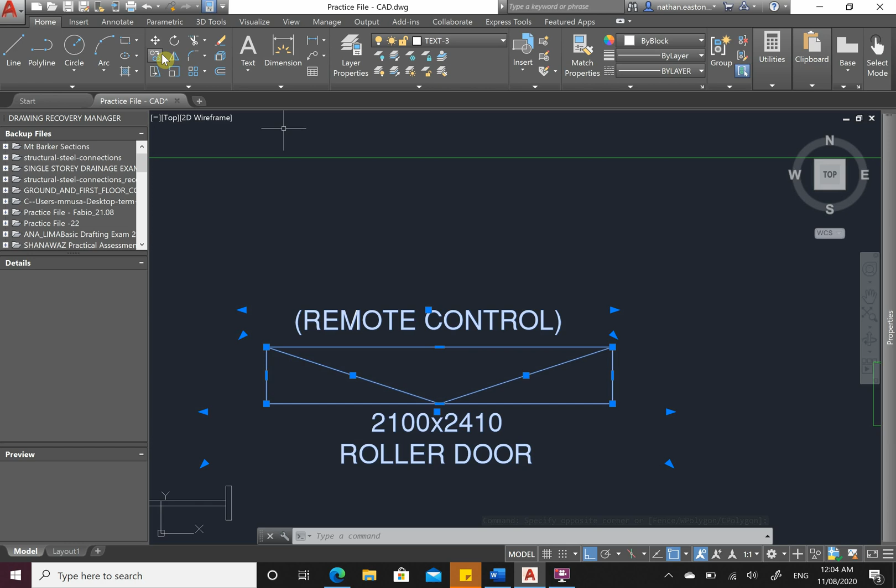So doors and windows. Now you have this here in your template. Let's start to put some in. Let's start with the garage door. So a single garage is this one here. So 2100 high, 2410 wide. Remember the stupid measurements that they decided to put for doors and windows. Copy, grabbing from the midpoint and going to put it at the midpoint here.

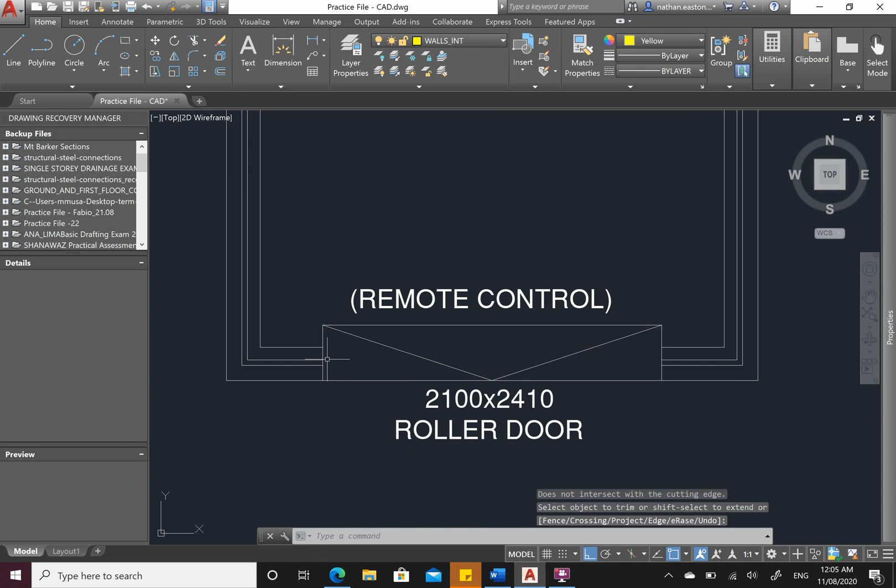In reality, our roller door doesn't sit outside of our house. The brick will sit on top of it. So let's move it from here to here. Alright, trim. Click the box I want to trim to. Enter or right click, and I'm trimming those lines. Enter. See how satisfying that is, cutting all those lines. It's very nice. Alright, next thing.

Entrance door is a 920 for our entrance door. I want it to open to the left. So this line here shows how it's going to open. So if the door is closed, it opens along that path. So it's opening to the left. Select it, copy, zoom right in, copy from the door jamb, and let's place it here. So it's going to sit on the stud. Okay, what you're going to notice is this door jamb sits nicely where the stud is.

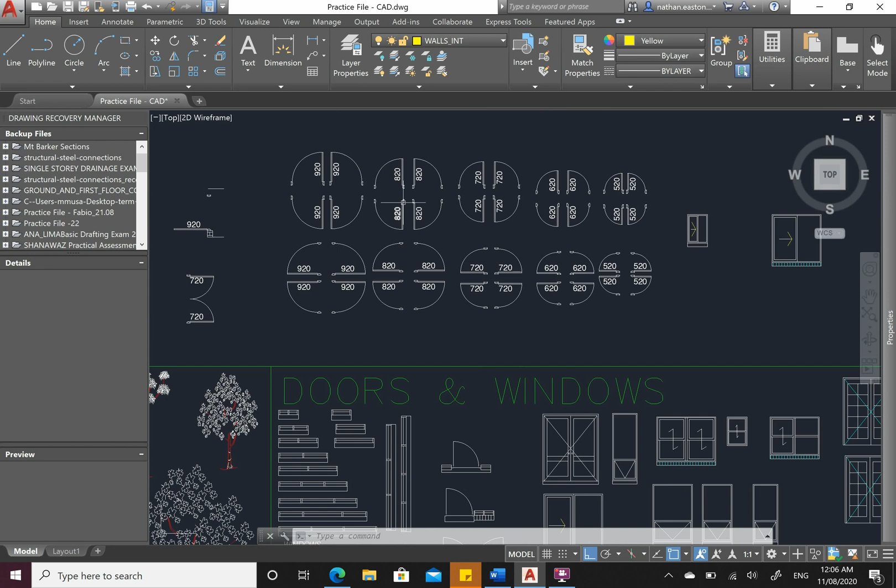So here is 920. Alright, I'm not going to trim that yet. I'm just going to leave it as it is for now, and we'll tidy it all up after. Garage door is an 820, opening this way. Copy again from internal of here. Now internal doors we don't measure, so we're just going to put them roughly there. Good rule of thumb is if you can, be 80 to 100 away. So that's 61. I might just shift it 19. Okay. So just a nice distance.

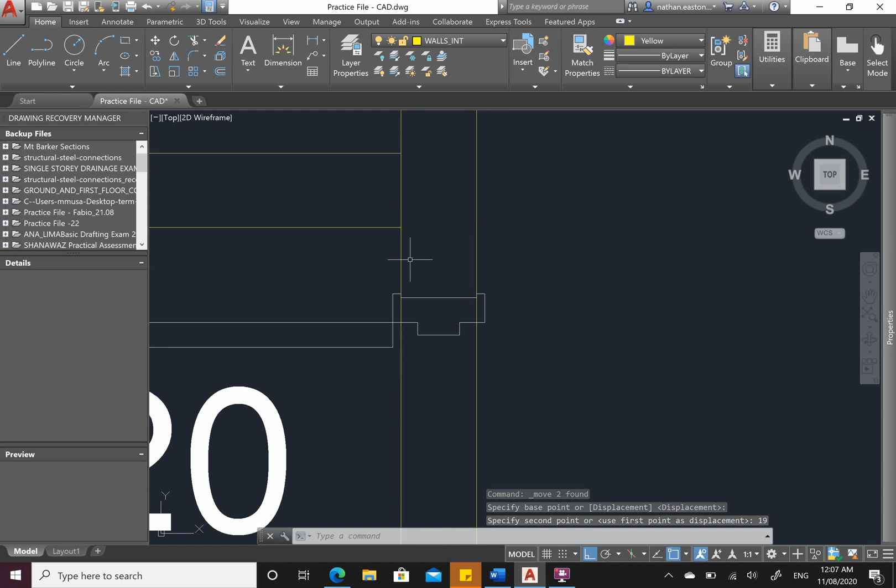You can put them hard up against it. You'll see down the track when we put on notation, we tend to shift a little bit around these here. But we'll have to put these exactly in for our external openings. But for now, maintain 80 to 100 gap away, and all should be okay.

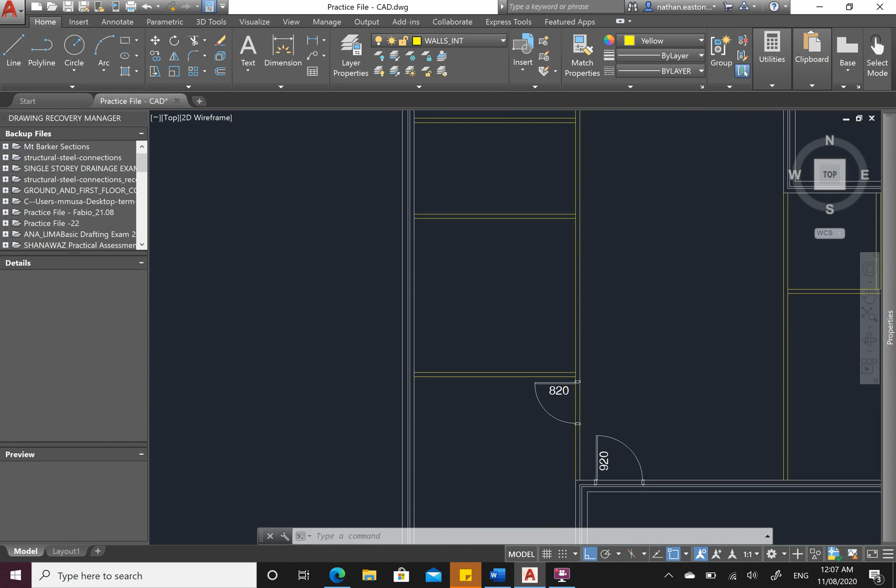The next thing I want to do is the door on the other side here. So there's two ways that I can do it. I can just mirror, or I can just grab the other door. So let's grab the other door. It's not the end of the world. Let's grab this one. Copy from here. Alright, so about there. Bathroom isn't an 820 door. Bedroom here is. So about there.

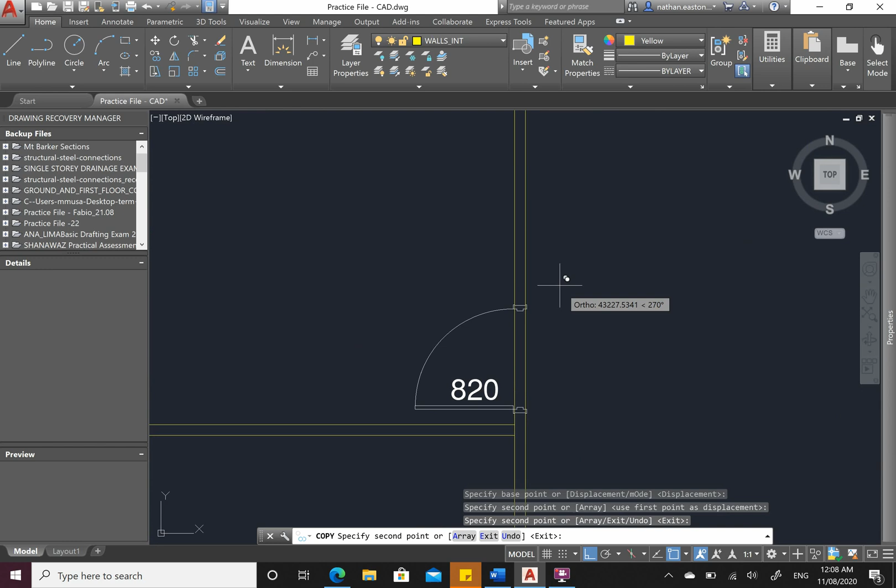Cool. I'm sorry if you can hear snoring, by the way. My dog has fallen asleep. And I don't really want to wake her up because she might bite me.

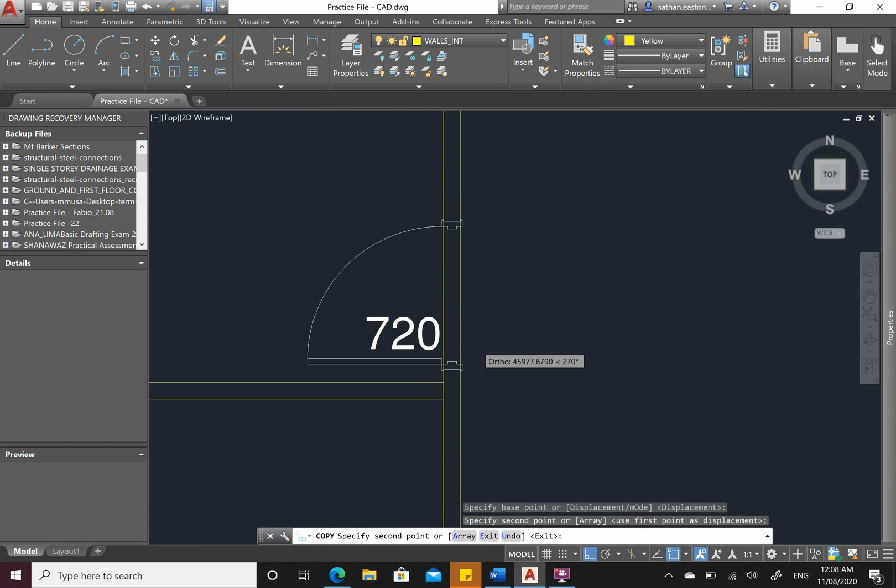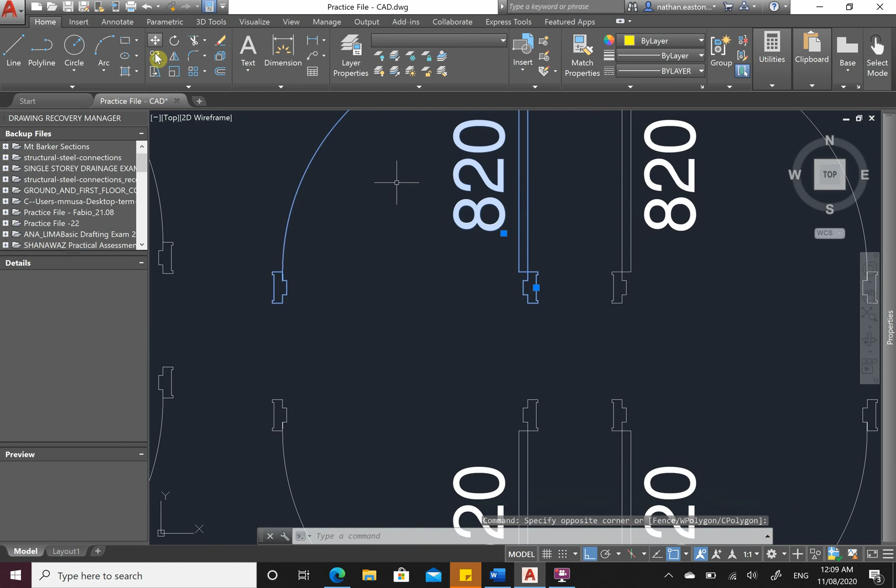Next thing is the bathroom, which is a 720 door. Copy from here. So bathroom door opening here. That's going to be an 820 door in there as well. So I can copy this one. Do in there. We're going to need a door here. Opening here. So what I'm trying to do with all my door openings is I want to open them up against a wall.

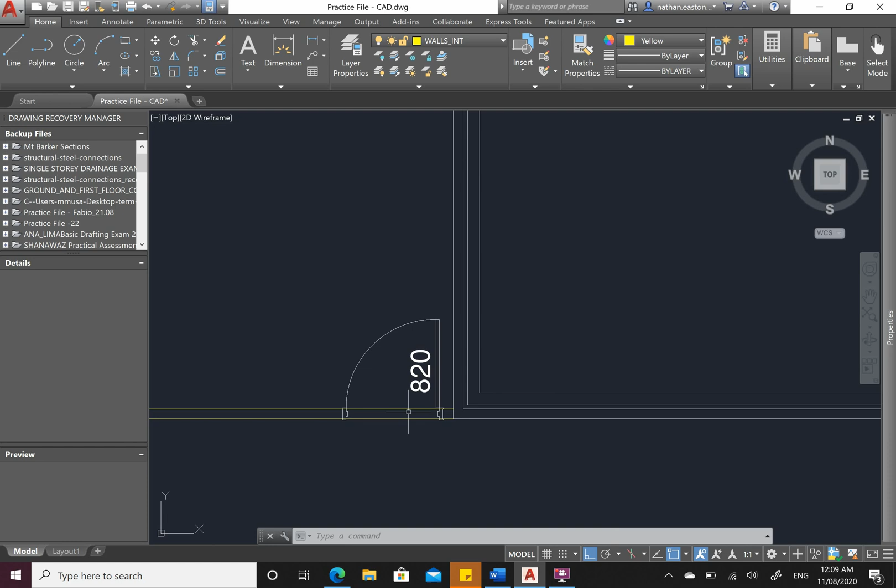So what I mean by that is you've got to try to visualize yourself walking into this house. If you're walking into this room, door is shut, so you're going to grab it probably with your right hand, you're going to push it open to the right, and then you're going to walk into open space. What you don't want is to open it from here the other way. So grab it with your left hand, push it open, and then have the door just wasting space on this side. So it's good practice to open against a wall. So if you look at all of them, they're all opening against a wall.

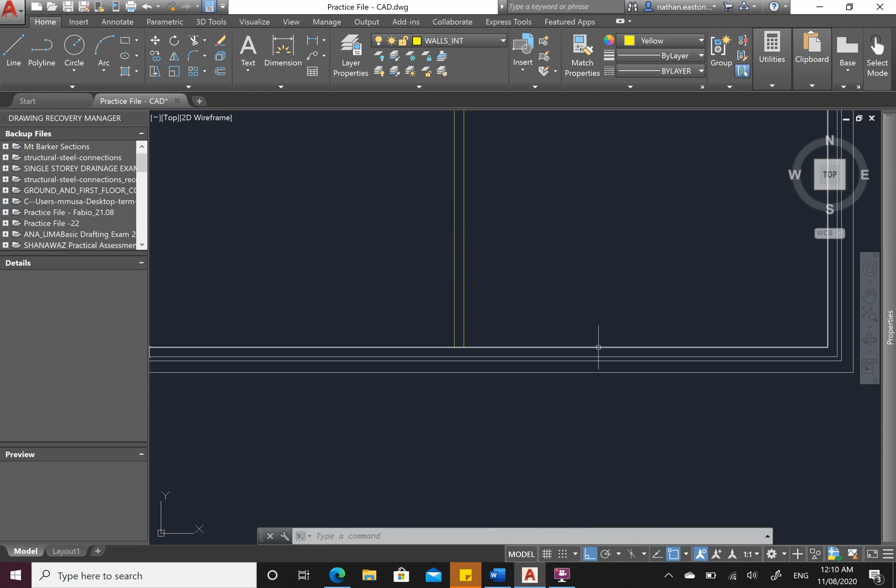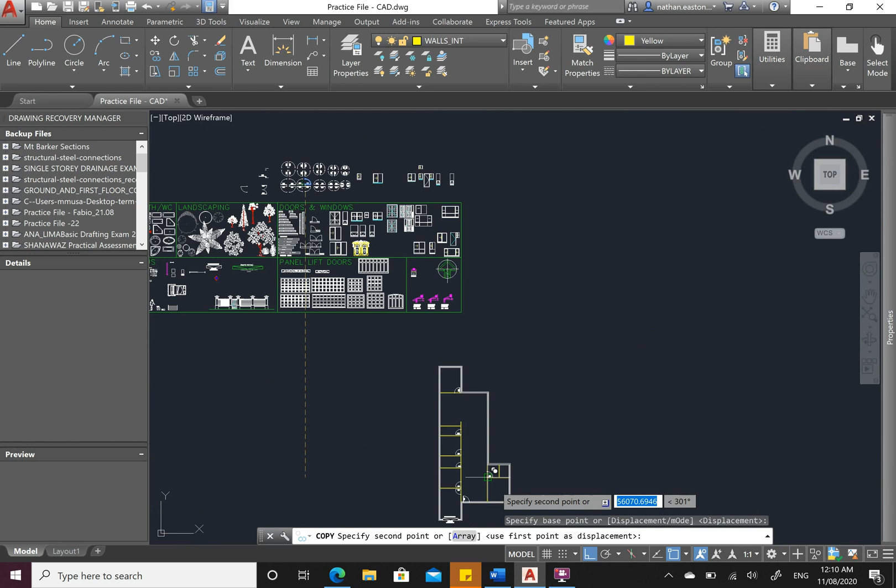Trying my best to have them open from right to left, except for the garage. At the moment, but we'll see. This one here for the master bedroom is going to be sitting here, opening against this wall, and then ensuite will open against this wall, and walk-in robe we're going to do something a bit different, a little bit fancy over there. So the main bedroom, 820 door, opening against the wall. Copy here. To there. Ensuite is a 720 door.

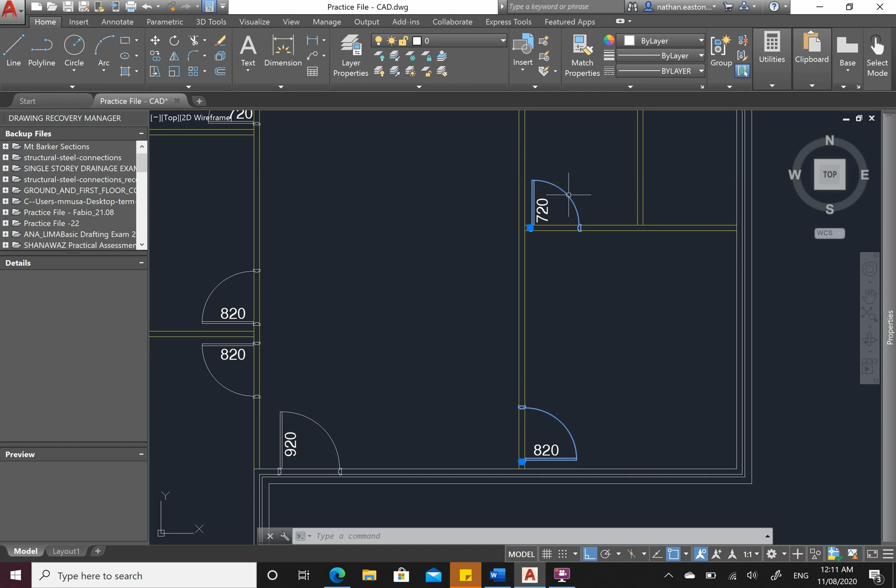Now, I know I'm going a bit quick through this. You can just pause the recording and find the doors and take your time going through it. Please don't rush this. Try to understand how things are coming together. The other thing that you'll notice is the doors are on this 0 layer, which I don't want. So let's select all the doors. The reason why I don't want this 0 layer is it doesn't print. And let's find door, awesome. So doors are here, cool. Now the 820 is text, so that's okay.

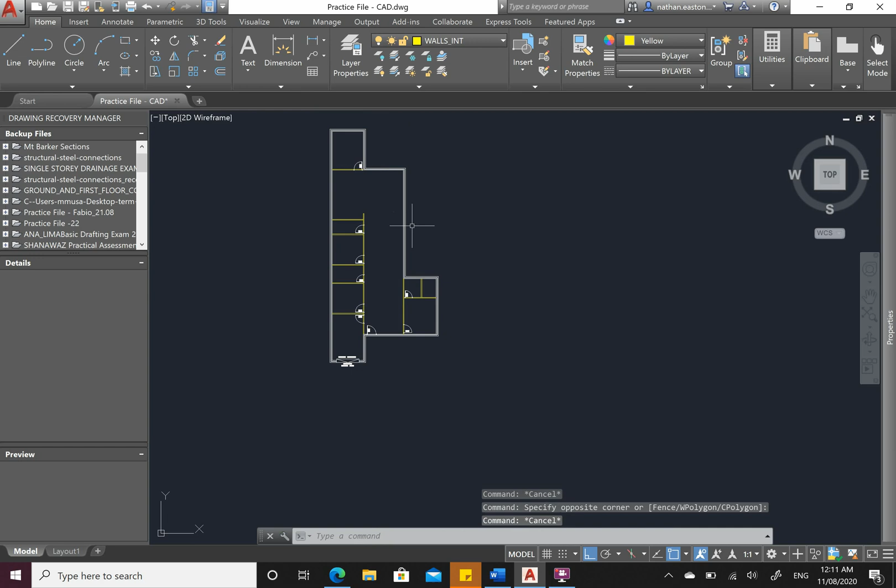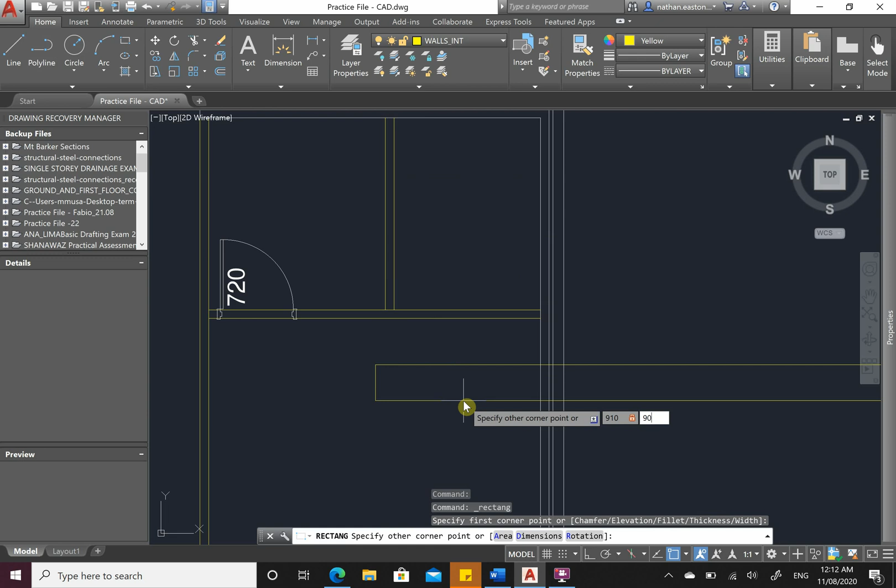Now this one here for the walk-in robe. So a walk-in robe is just a little room. You walk in, you have your clothes hanging up, like a wardrobe that's built in. Okay, but you walk in, you got your clothes there, you get changed and get ready for work and all of that. So we don't have to put a door here. What we can do is draw a rectangle. I'm going to draw one in here, which is 910 wide by 90. Just going to change this layer here to be on doors as well. So door.

What I'm going to do as well is I'll make it dashed. Let's go this one. Change properties. Change the scale. Let's try 500. See how that looks. Doesn't really look that good. 1500. Not really doing much. What about 1? Looks a bit better.

So move over here. Now this one here we can try to center the best we can. So it's 320. That's 270. So there's 50 millimeters between them. So move 25 to the left. So just putting it center. Trim. Select what I'm trimming to, which is this rectangle. Enter. And what I want to do is cut these other lines.

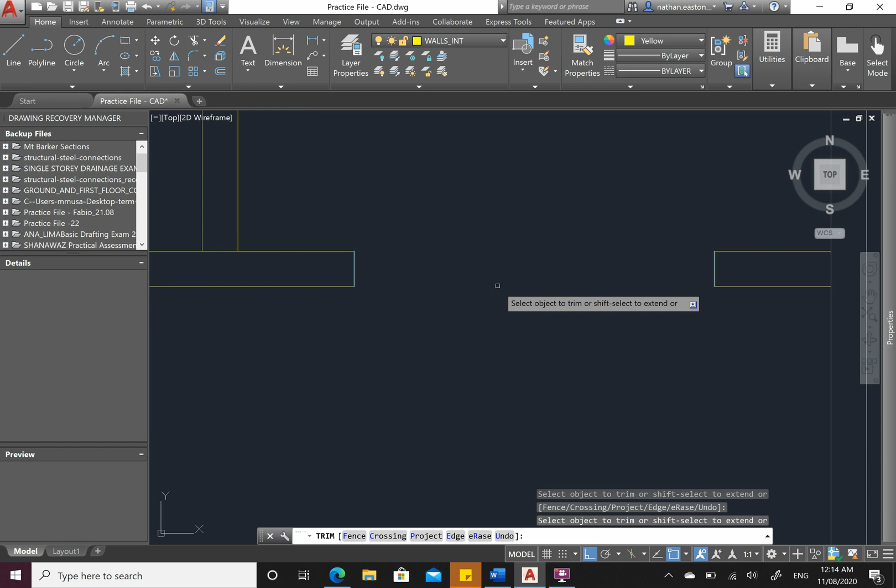Okay. Which doesn't really work too well for me. So how am I going to get around that? Trim from here. I can either try to do my best to miss this dashed line, which good luck to you. The other thing that we've got is I have a button sitting down here. It's under the modify, have my little arrow with modify, and I have a thing called layer properties. Layer property, sorry, bring to the front or send to the back. It's a function of the layers.

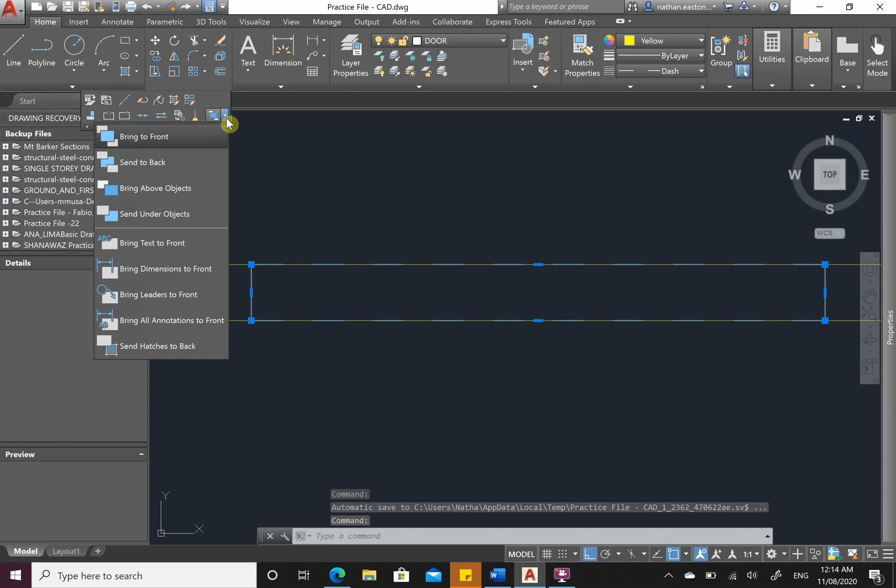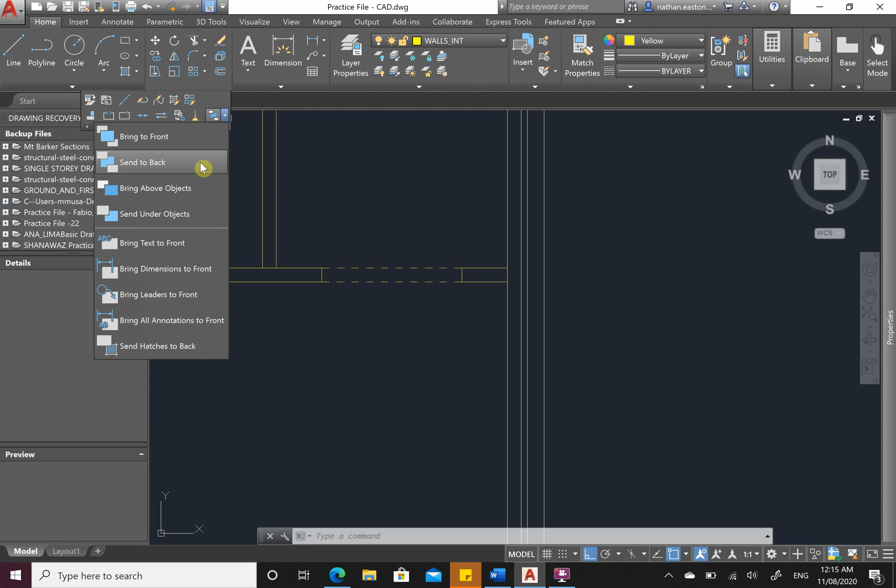So I can try to send this to the back, which means I'll grab this line first. So if I trim to here, I'm going to cut that line first. So it's a useful little function. You'll use it for all kinds of different things. So it's just down here. And you've got bring to the front or send to the back. So you've got the two options there. You don't really use too many of these other ones, but these two you definitely will.

Cool. So this here is a 910 opening. It's a square arch opening. Basically there's no door, so you won't have a door sitting here. Alright. And if I don't want it to sit in the middle, so if I want to put, say, my shelving around there, stretch this one here and just move it across a little bit. You'll see when we annotate drawings, these don't have to be super accurate. They have to fit, but they don't have to be accurate.

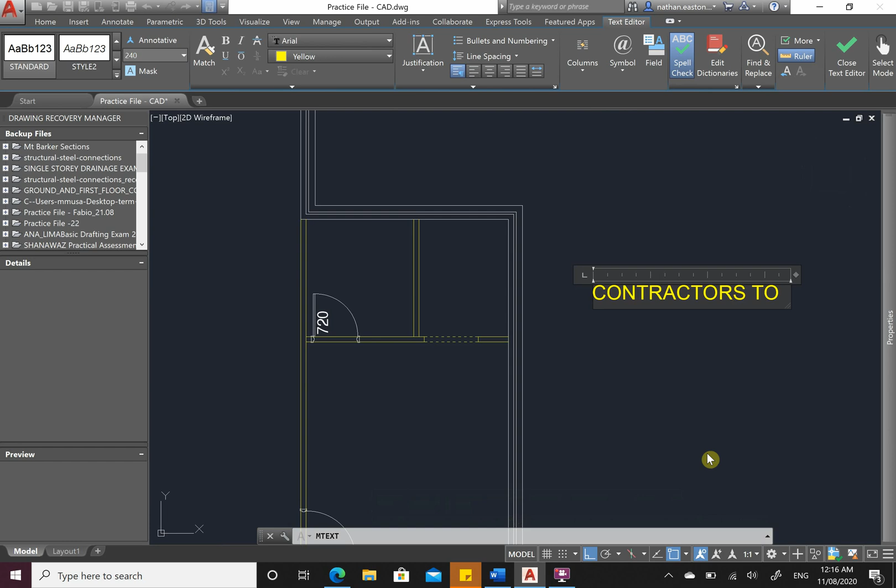On our drawings, what we're going to put is we'll put in a big text box. We're going to put something like this. So contractors, if I can spell, contractors to ensure all measurements prior to cutting on site. Alright, so basically we're going to put in some kind of comment on our drawings. Let me get rid of that. Where our contractors are to ensure all of our measurements are done and they check it all before they do anything. So it's like a kind of get out of jail free card for us.

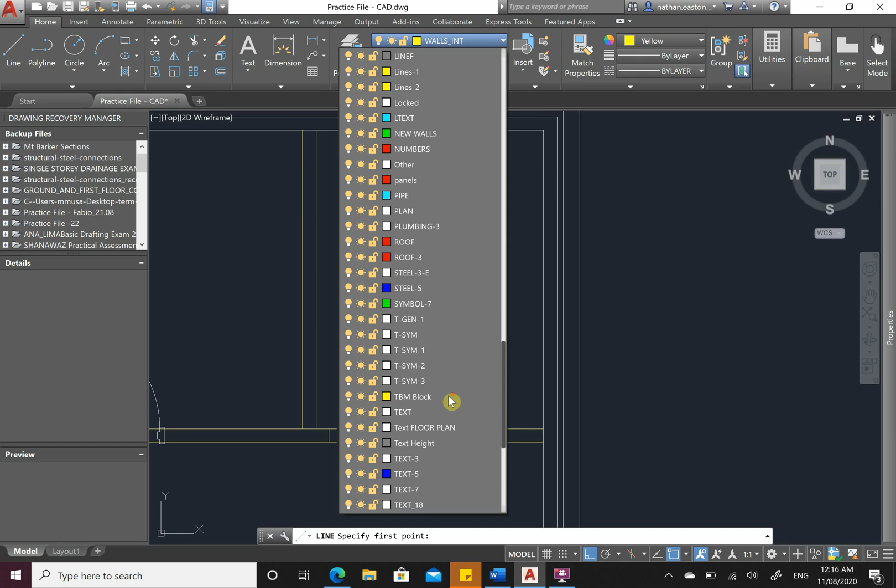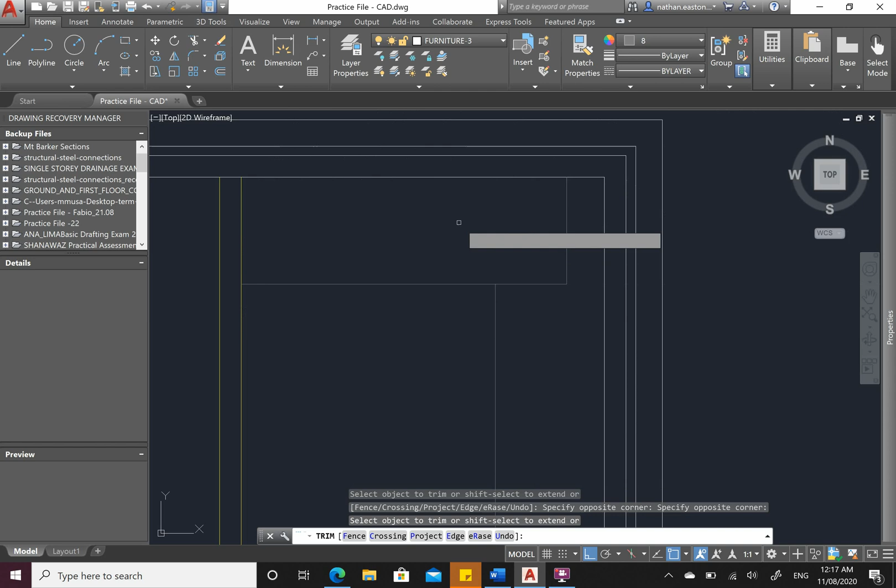Now, I'm going to get off of internal walls. What I'll do is I'll put this on furniture and I'm going to change the color to grey. So from here, I'm going to come across 450. I'm going to come up to here. Going to repeat a line, so 450, and come across to here. Trim this one, trim that one, enter, delete, and delete. Get rid of them.

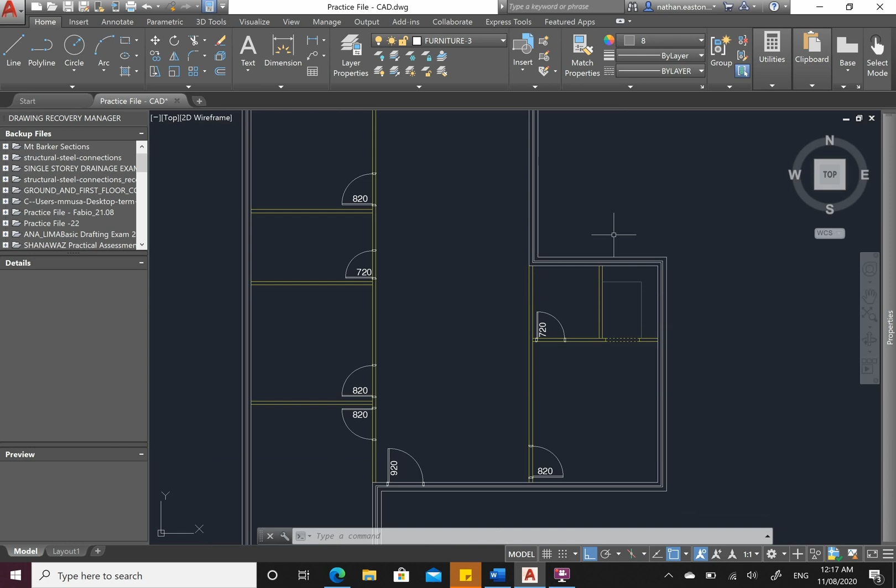So 450 is our standard shelving, okay? 600 for benches, 450 for linens or for walk-in robe shelving, okay? It's usually enough to hang your jackets and stuff up on. Cool. Alright, so we've got our doors in. We need a sliding door here. So here we have a sliding door. Copy from here. I'm just going to chuck this one anywhere here for now. And I'll place it in a second exactly where I want it to go.

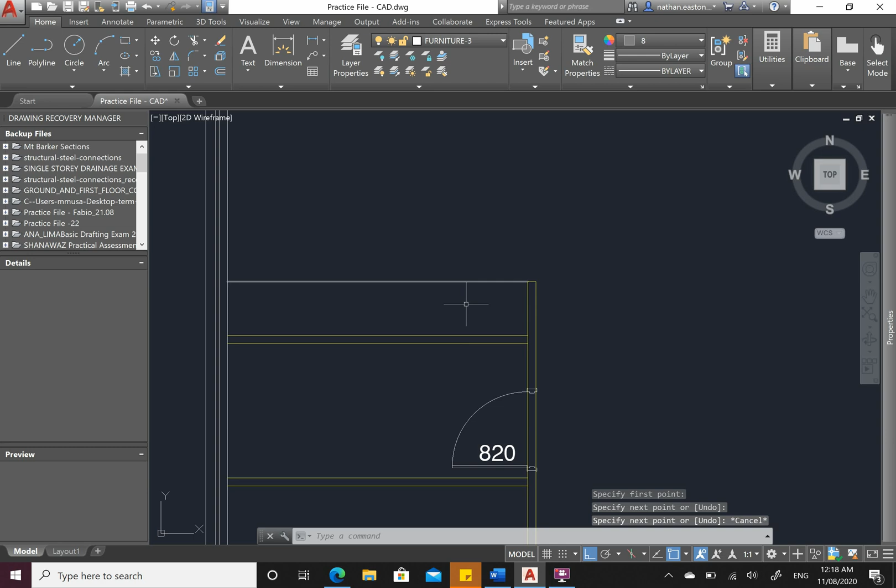Now what else do I need to do? Well, we'll tidy up the doors after. Let's draw in our kitchen bench, which is from here. So our kitchen bench is a 600mm bench top, and we need to put in our stove. Let's grab a stove, grab a sink, copy, and let's bring both of these back to our drawing. Cool. So just move this one so it's sitting in here.

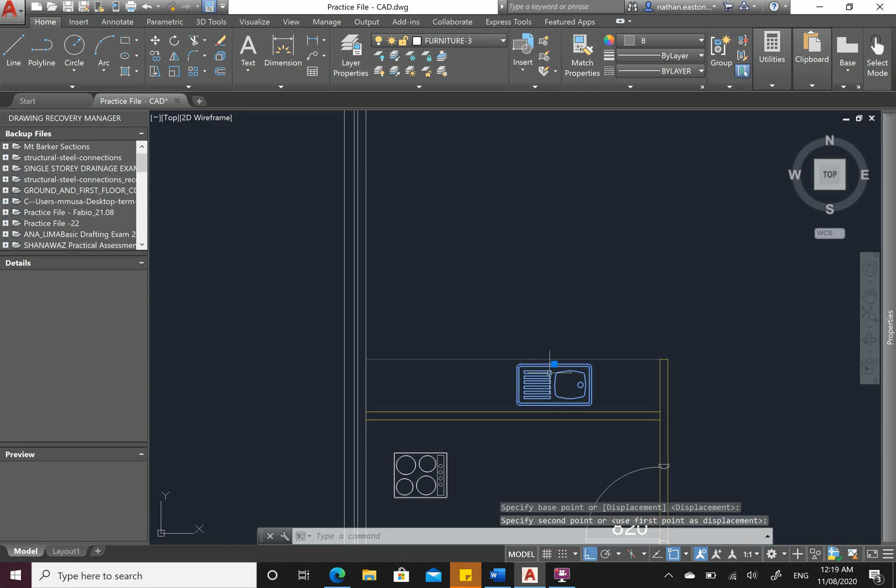I think you can now hear the dog snoring.

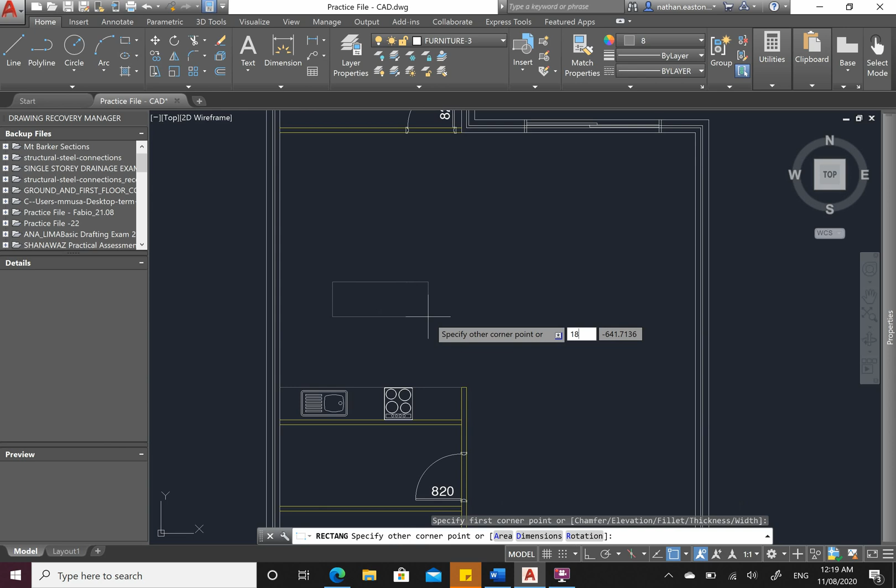And let's rotate these. Here is the back of the oven. Move from here to, say, here. Now we're not designing the kitchen. We can do it if we're requested to, but usually we just show where the kitchen goes and the client will deal with that later. If I want to put an island in, I can put in an island, say 1800 by 900.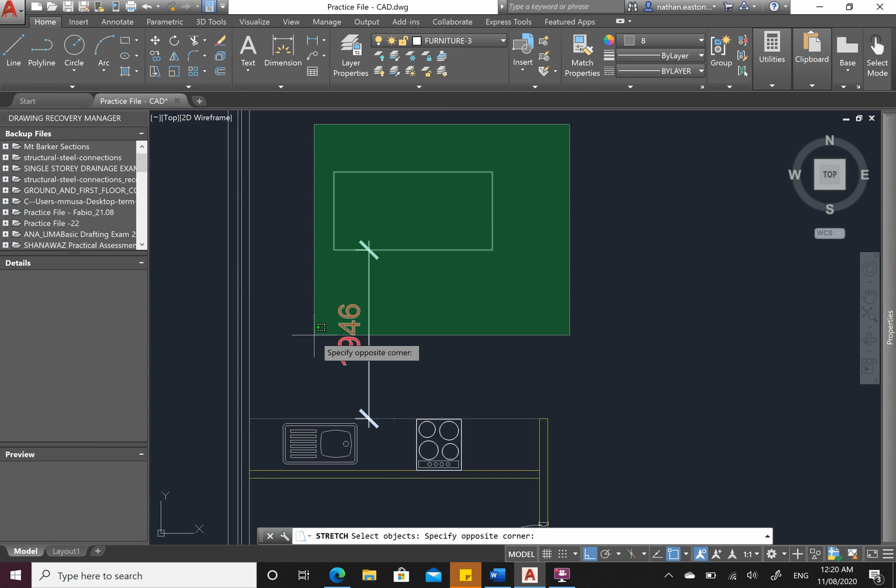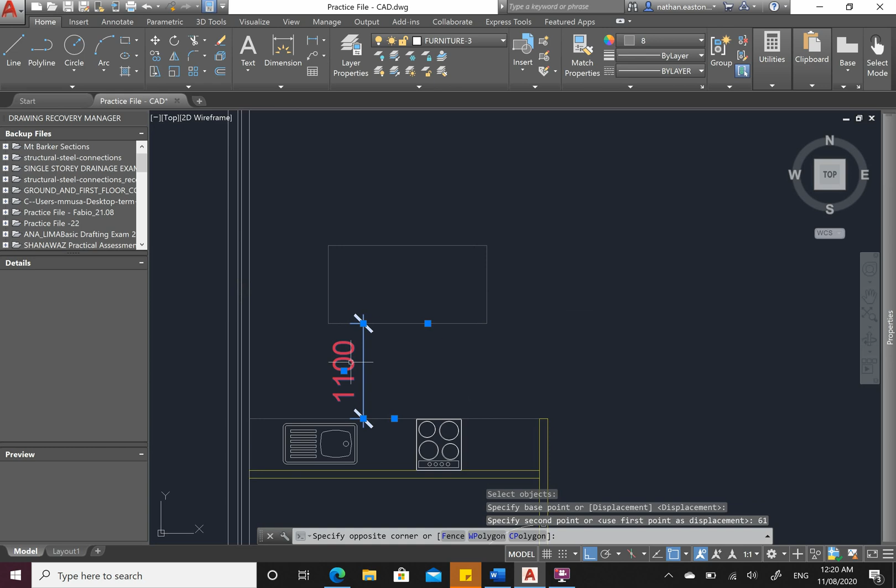Measure the distance, stretch. Now it's good to have 1100 between them. Sorry, I just have to check what that measurement was again. So 1100 between this kitchen island and the kitchen bench, so you can walk through it and actually move around without feeling too crowded. So from here, I'm moving down 846. To the side, I have 961. Let's stretch or move either way. 61. Cool. So that's okay to sit there now.

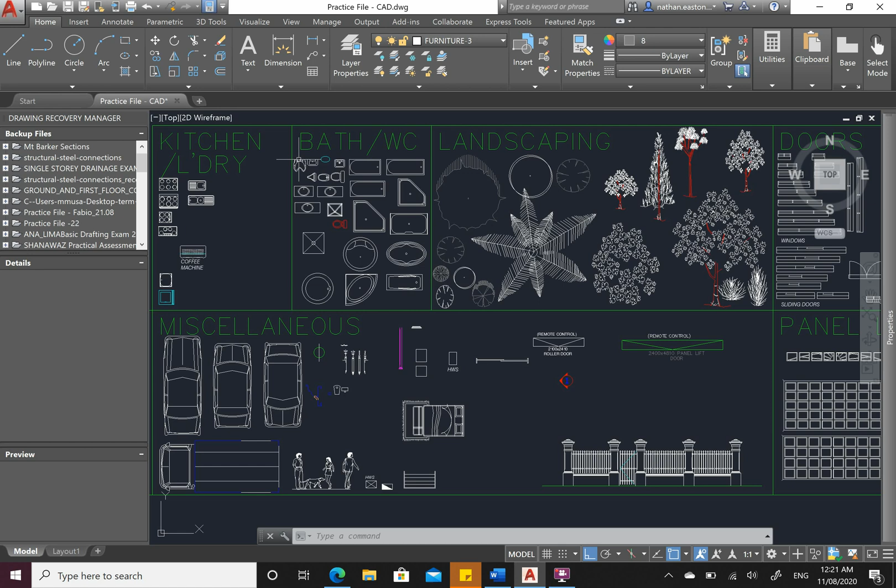All right. Let's do the ensuite. So grab a shower. Copy from the corner. Let's tuck in the shower, say here. Alright, so open the door, shower's in front of you. Let's put the toilet over here. Grab a toilet, copy from here.

Rotate up, and then just moving it again to the back wall. It's a good idea to put the toilet against an external wall for ventilation. What you'll see is we'll always put a window where possible by the toilet so you can open it up to ventilate the room. And I need a hand basin in there as well.

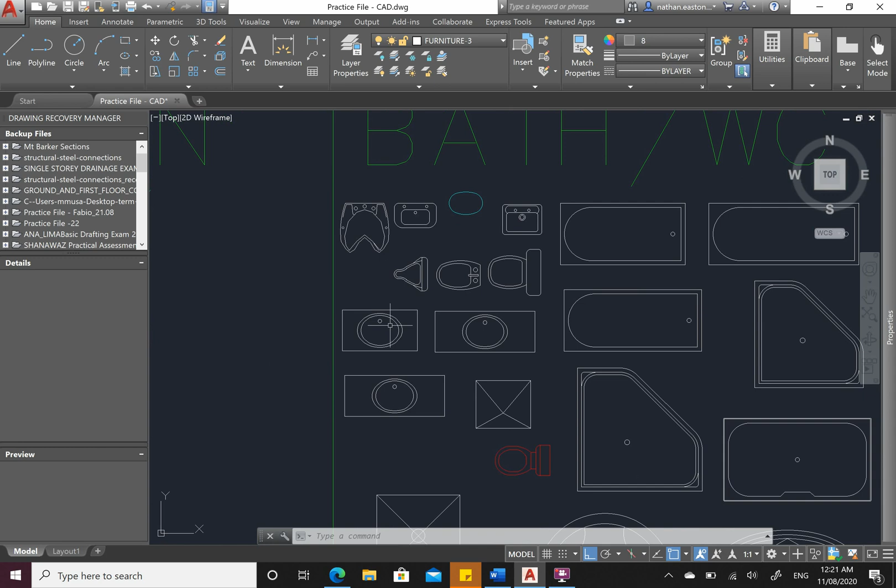So this is a hand basin and so is this. We'll just put a little one in there now, because we're not designing the interior, that's someone else's problem. We just want to show that everything kind of fits. Alright, this is a very small hand basin, but there's plenty of room there if we need it. So let's put it against this back wall.

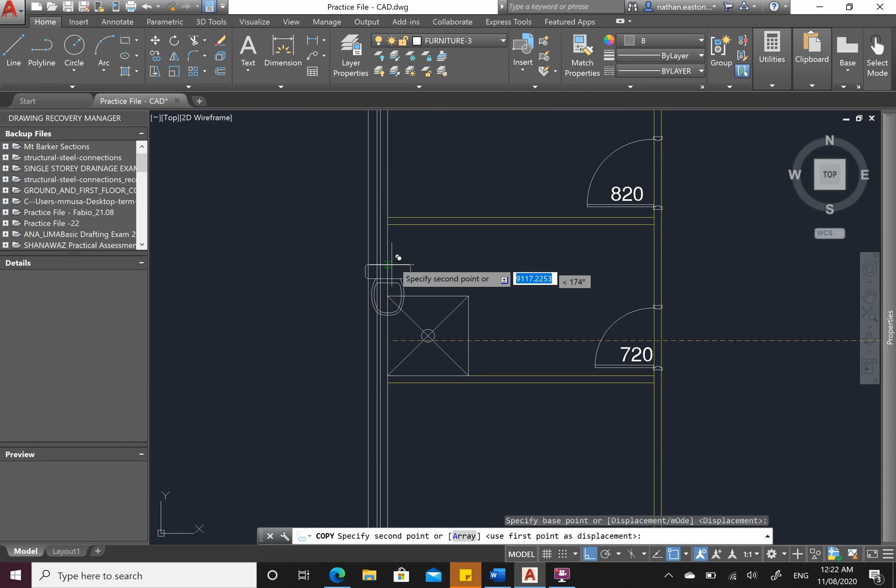Alright, so ensuite. This is a bathroom here. So grab this shower. Shower can go here. Need a toilet, so grab the toilet. Alright, obviously I want the back of the toilet to be against the outside wall. And now I need a basin, so I'll grab this one, copy, and bring it in here. Rotate, move,

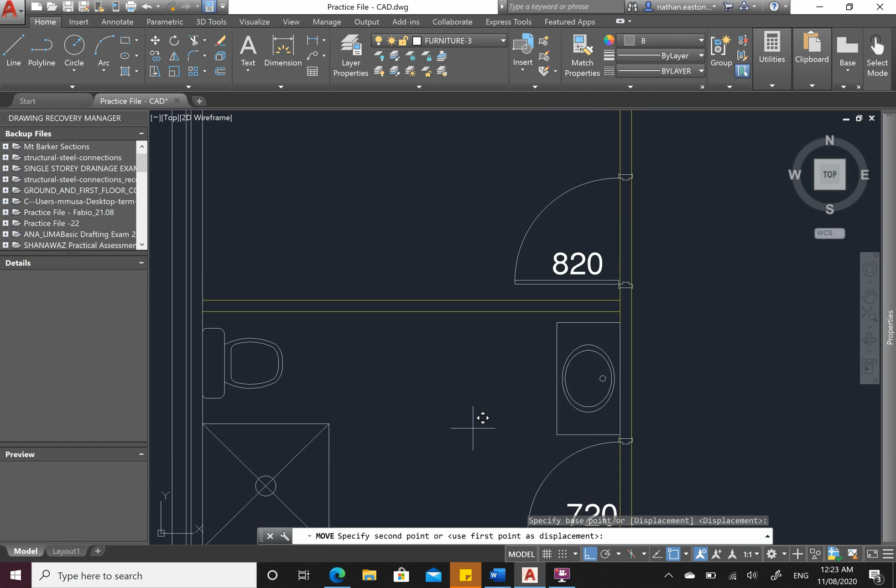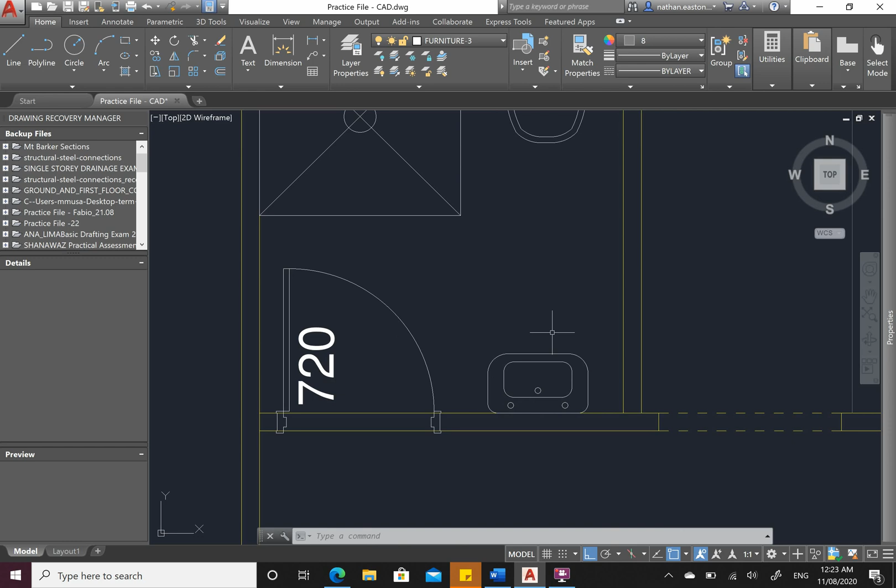along here somewhere. So what we're looking for is, we're not designing these. Down the track we will obviously have to go through and work out where all of our plumbing and stuff is, but it's more important for us now to work out a layout that fits and works. The actual size of this basin here, I mean, you go to Bunnings, you go to any kind of homeware store, there will be thousands of different basins you can pick from. Same with showers, same with toilets. We're not going to go into that detail. We just have to make sure we've got enough room for everything.

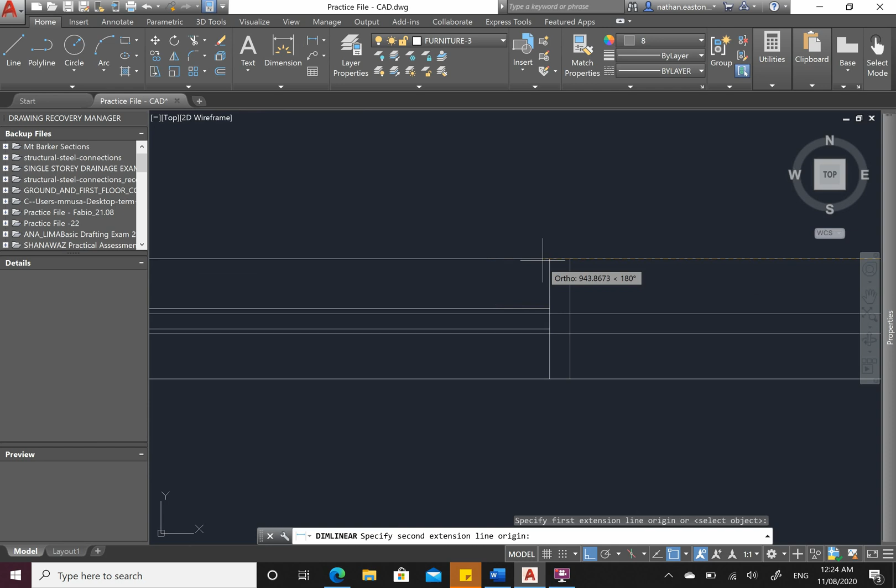Cool. So let's put this door where it should sit. So measure. I'm going to measure from the external corner to here. Okay, that's 864 point something. It's actually 863 point something. Now let's select just the door, move, from this corner to here. Select it again, move, and let's move a known distance. Alright, so I can see the ortho is changing as I go, so let's move it exactly 1,000. Alright, now we can check, is it 1,000 from here? 770, so we can center it if we would like, but this is okay for now.

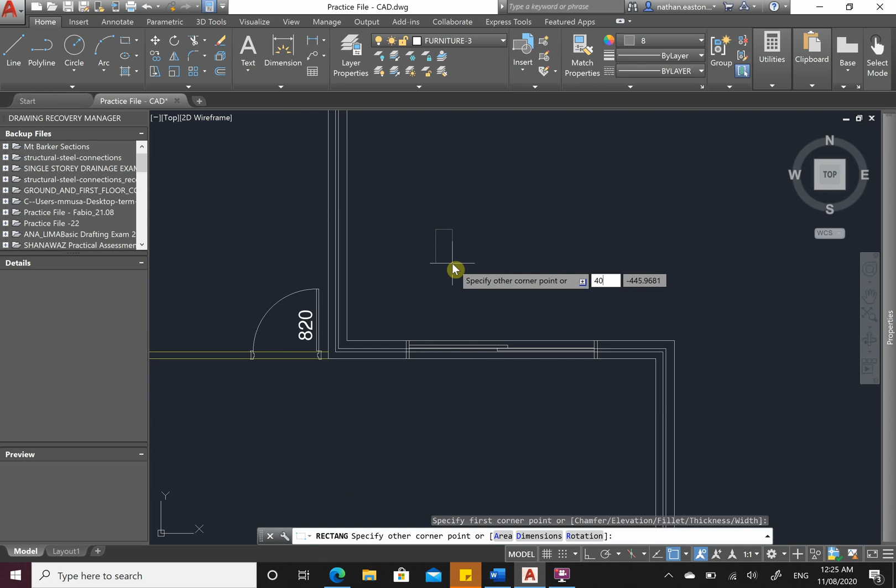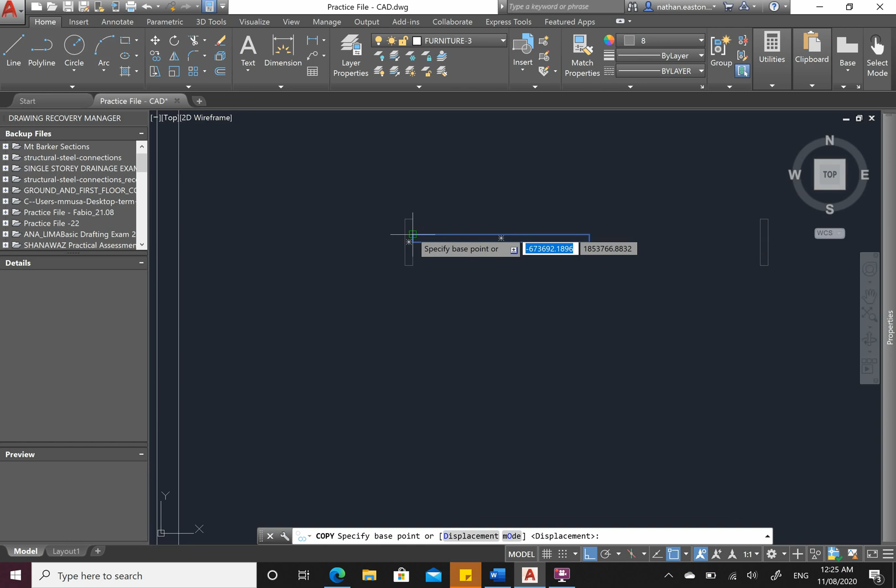Now, I'm fairly certain I've given you guys this door. If I haven't, you can draw one. So to draw one, it's 40 wide by 240, which is the thickness of the wall. Okay. Copy another one over here, say 1800 or 1810. And then it's just the same thing. Go from its midpoint, so 940, copy, and go from say there to there, stretch both of these until that meets that. Alright, that will work as well. So you can draw them. But this one here should be in your doors. Okay, so that pretty much does our doors.

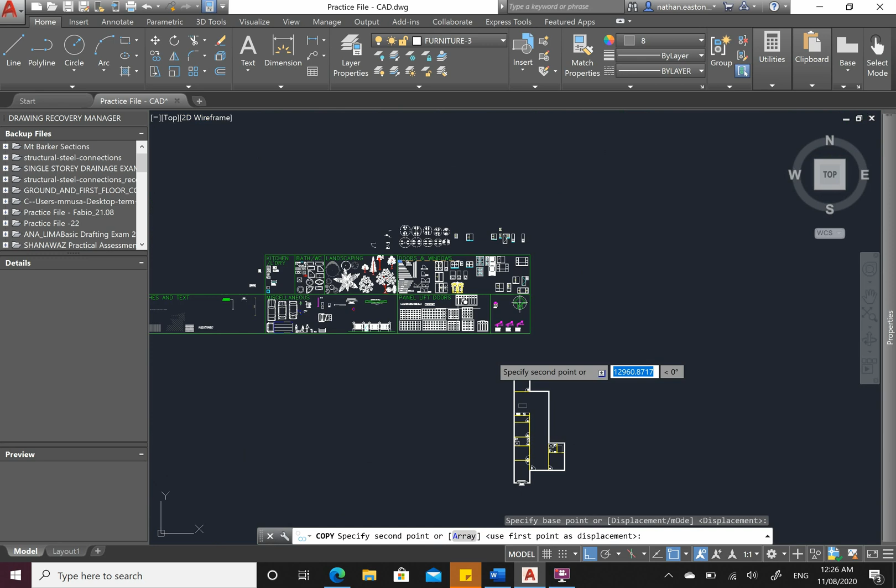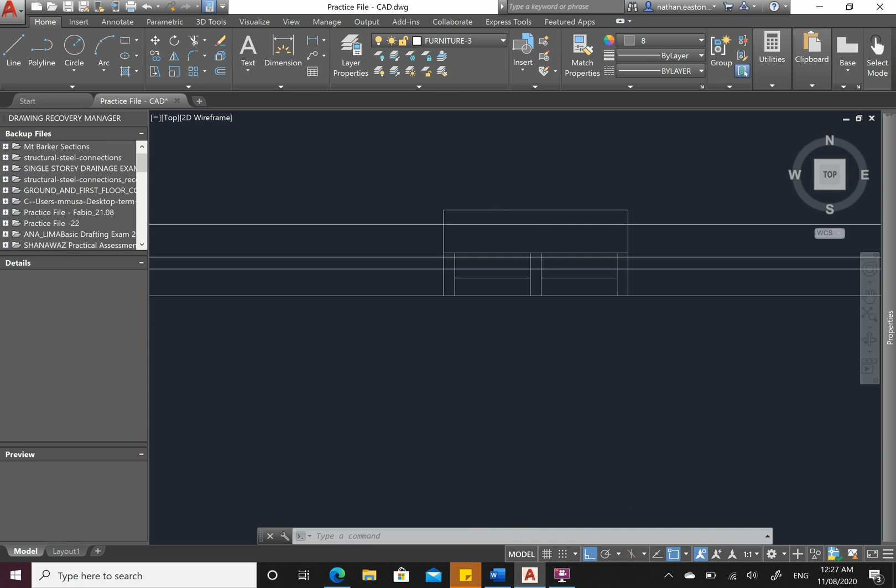We've got windows to go through as well. So grab a window. So I'm going to grab this one, copy from here. Now all designers have different windows that they will use. It's up to you. We're going to use these, it's just a bit easier. This here sits on the wall, so it sits like this. This little bit that sits past the wall is, if you look at your window in your room, in your house, you've got this little stupid ledge that sits out past the brick, and that's what that there is. So I can check the width of this. So this window here is a 610. Okay.

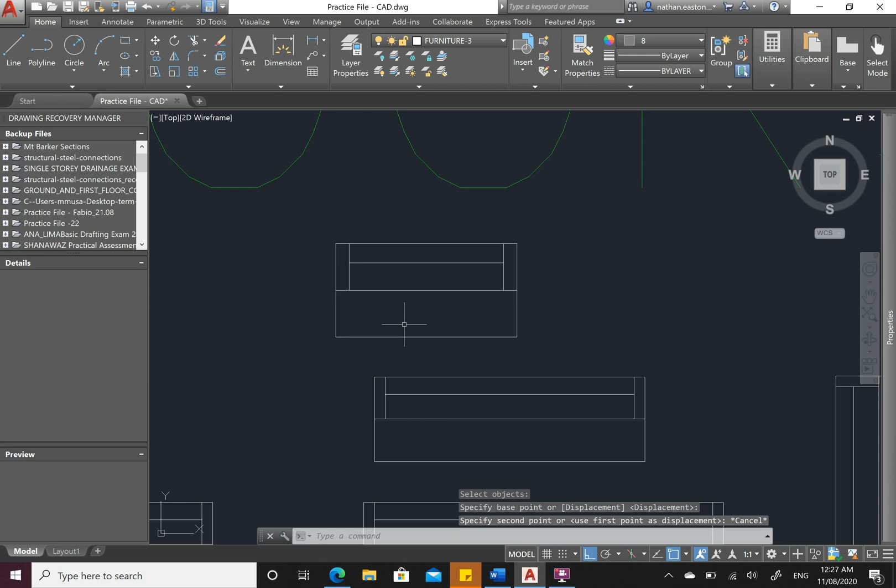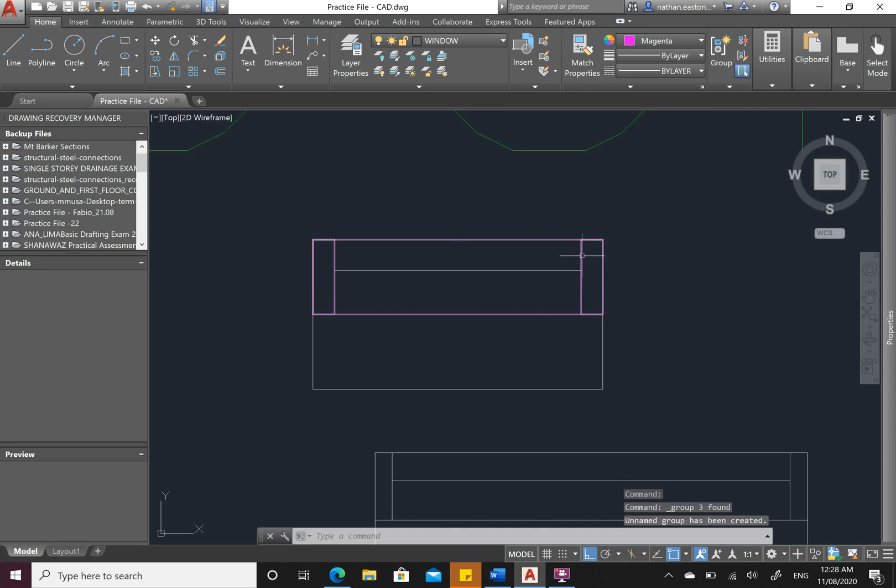We can redraw them. Okay, we can't stretch these blocks. So if you want bigger ones, you can just grab them from here. Okay, they're standard sizes. You can grab this one, but you're not going to be able to stretch any of them. So if you want to stretch them and make them bigger and smaller and stuff, you will need to go through and just sketch over one of them and group them together. So what I mean by that is, here, make sure we're drawing windows now. So draw a rectangle. I'll make it pink so it stands out. Sorry, pink. So rectangle. So one there. One there. One there. So what I can do, select them all, group, and now they're all fixed together. Okay.

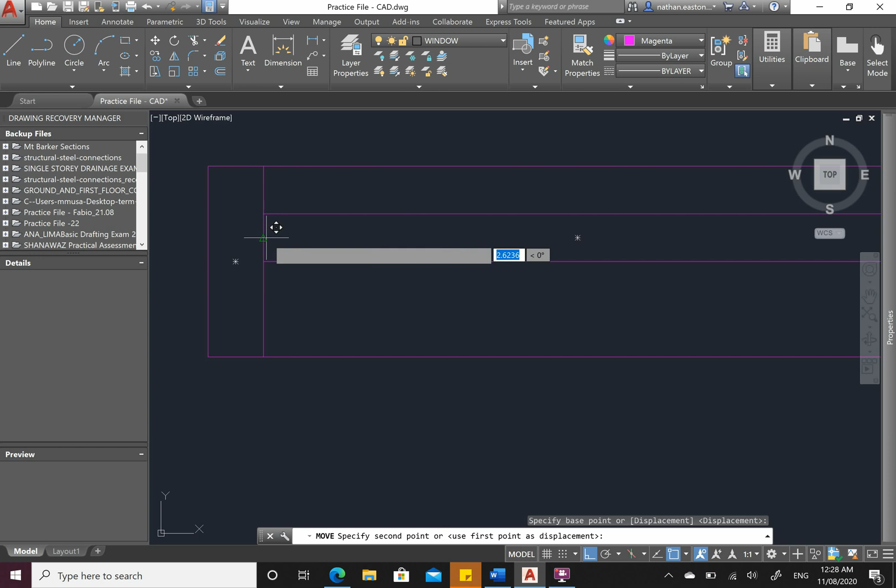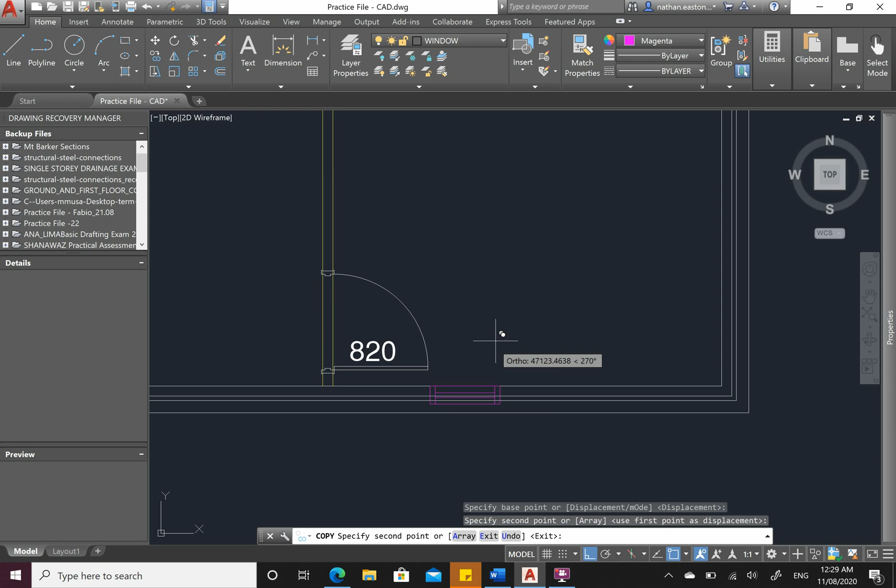I'll draw one from say here to here, which is going to be negative 519 by 40. Move till that midpoint sits at that midpoint. That's a 610 window that I can use. Stretch, and I can make it as big as I want. Alright, so I can use these windows. There's no reason why I can't. It's my decision. I'm the designer in this case. So if I want this window, if I want to sit it, you know, here. Now, what I can see is obviously it's not big enough. So this here is 160, it needs to be 240.

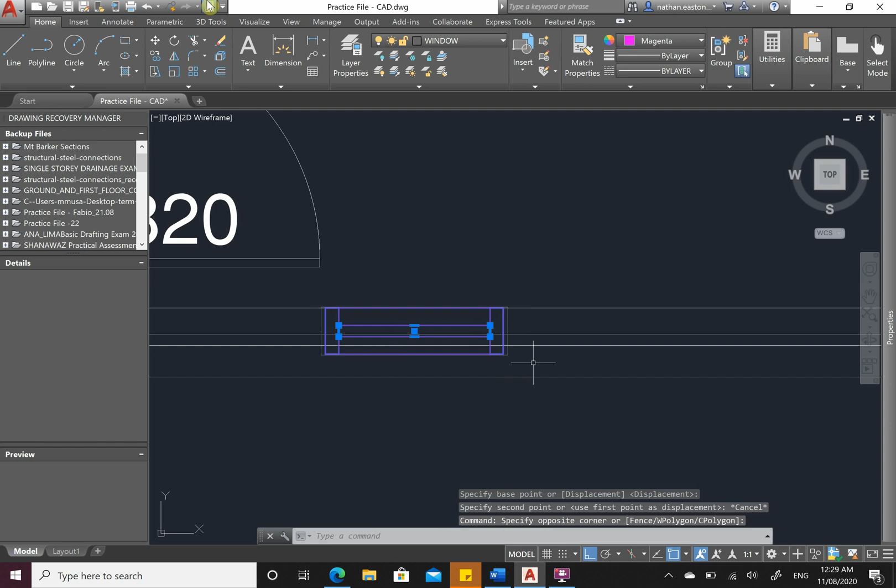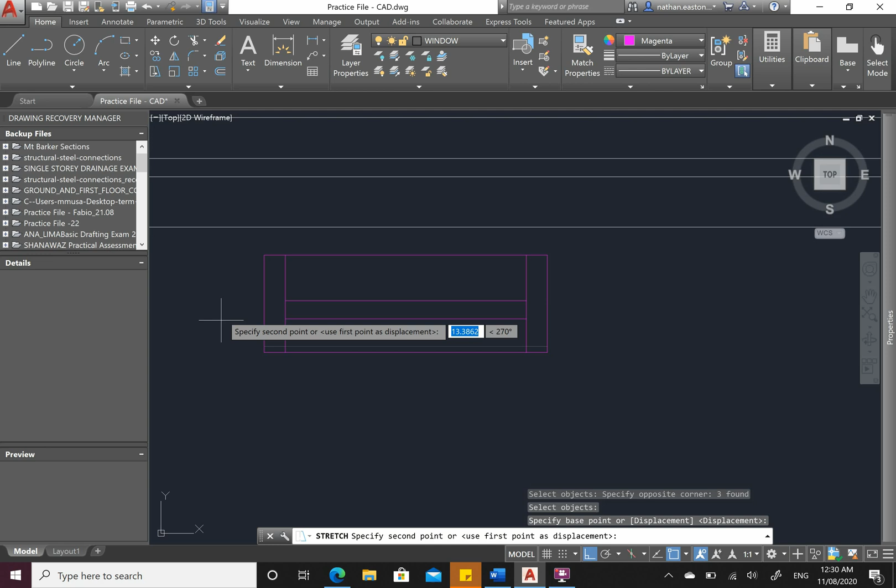So again, stretch. I want to stretch these. Okay, can stretch it as far down as I want. So we can alter them. Let's alter it while we're here. Stretch between here. I'll do the top first and the bottom second to just even it out. So 240 take 160 is 80. So 40, that gets me to 200. Stretch the bottom of it now. Another 40. Cool. Move from here to here. Alright.

Now, what I'll do is I'll pause the recording here and I'll continue on with another one, putting in the rest of the windows and then tidying it up.